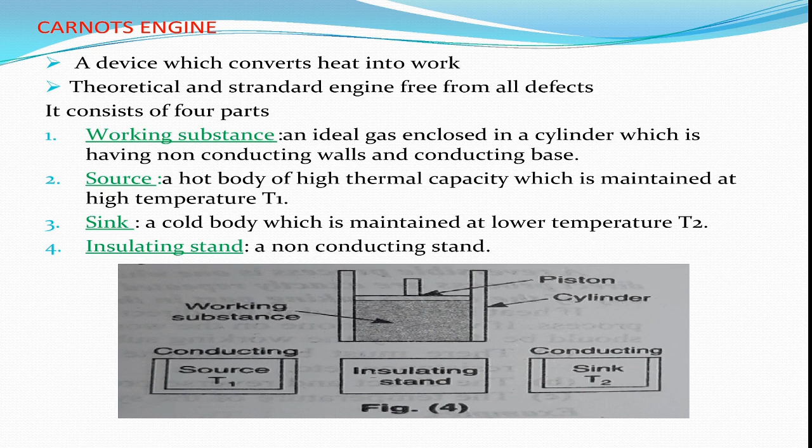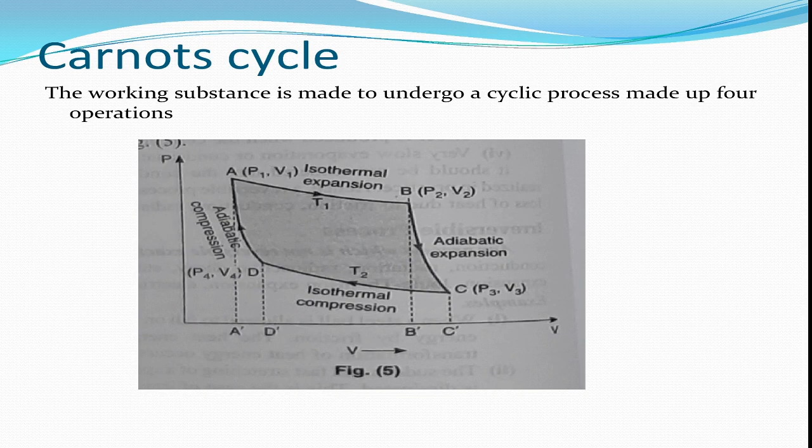Let us see the working of Carnot's engine. During the working of Carnot's engine, the working substance undergoes a cyclic process which is made up of four parts. The first one, isothermal expansion. Here, the AB curve represents the isothermal expansion. BC curve represents adiabatic expansion. CD curve represents isothermal compression. DA curve represents adiabatic compression. Let me explain one by one.

The first one, isothermal expansion. Initially, consider 1 gram mole of a gas contained in the cylinder. Here, A is the initial state of the gas where it has pressure P1, volume V1 and temperature T1. Now, the cylinder is placed on the source and the piston is moved slowly upwards. Here, the base is conducting, so there is a heat flow from source to the gas so that the gas expands isothermally.

Here the pressure will decrease and volume will increase. During this expansion, fall of temperature is compensated by supply of heat from the source. Finally, the gas is at the final state B with pressure P2, volume V2 and temperature T1. Here, the quantity of heat absorbed from the source Q1 is equal to the amount of work done W1 by the gas through this expansion from A to B.

That is, Q1 equals W1 equals integral V1 to V2 PdV. This is the total work done. We can replace P with RT1 by V by using Boyle's law. After integration of this equation, we get the final equation RT1 log base e V1 by V2. This work done is equal to the area under ABB'A'A.

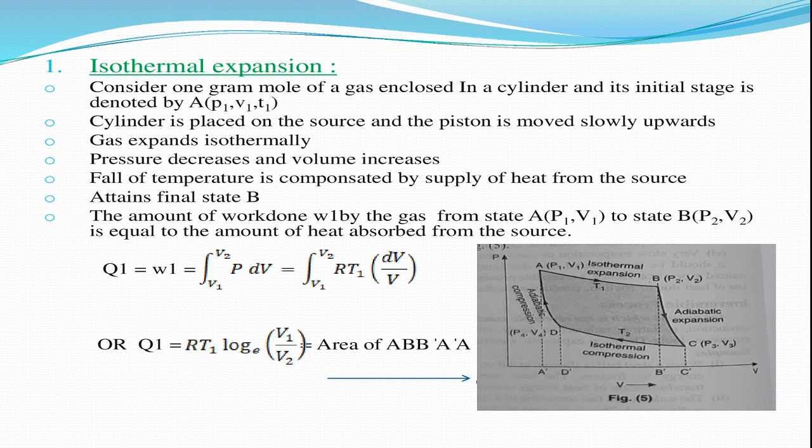The second one, adiabatic expansion. It is represented by the curve BC. In this, the cylinder is detached from the source and is placed on the insulating stand. Now the piston is allowed to move further adiabatically so that there is no heat flow between the insulating stand and the working substance, that is gas. This expansion continues till the temperature of the gas is the same as that of the sink, which is maintained at T2 Kelvin. Here, the gas does external work on the piston by utilizing its internal energy.

Finally, the gas comes to a state C, with pressure P3, volume V3 and temperature T2. In this expansion, the work done by the gas W3 is equal to integral from V2 to V3 PdV. This is an adiabatic process, that's why we can take the adiabatic relation. Then we can replace P with K by V power gamma. After integration, we get this equation. This work done is equal to the area under BCC'B'B.

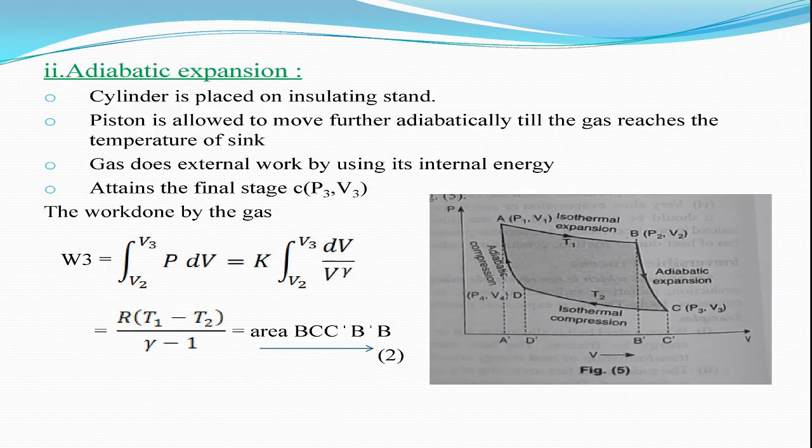Now, third part, that is isothermal compression. It can be represented by the curve CD in the figure. In this, the cylinder is separated from the insulating stand and placed on the sink, which is at a temperature T2 Kelvin. Here, the gas is compressed isothermally because the heat developed in compression passes to the sink. The gas finally gets the state D, where the pressure is P4, volume V4 and temperature T2.

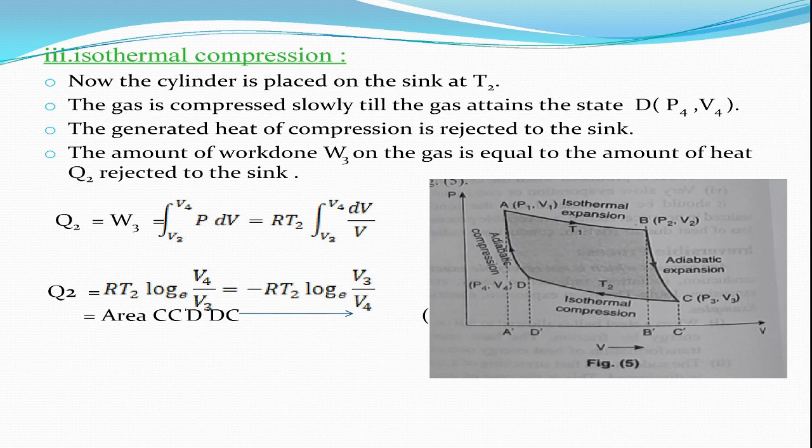Now the quantity of heat rejected to the sink be Q2, that is equal to the work done on the gas. That can be represented by W3 is equals to integral V3 to V4 PdV. We again take Boyle's law and we can replace P with capital R T2 by V. After integration, we will get this equation, and we can modify this equation into this one. So this work done in this isothermal compression is equal to the area under CC dash D dash DC curve.

And last part is adiabatic compression. In this process, the cylinder is detached from the sink and placed on the insulating stand. The gas is compressed such that it undergoes slow adiabatic compression till the temperature of gas rises to the initial temperature T1 and pressure P1.

In this process, the work done on the gas can be represented by W4, which is equal to the integral V4 to V1 PdV. We again take the adiabatic relation in this. We can get the final equation like this. This work done is equal to the area under D dash A dash AD. So these are the four operations.

Now the net work done by the gas, that is W is equals to W1 plus W2 plus W3 plus W4, and we can substitute all the values from the above four processes. We can get the simplified equation RT1 log base e V2 by V1 minus RT2 log base e V3 by V4.

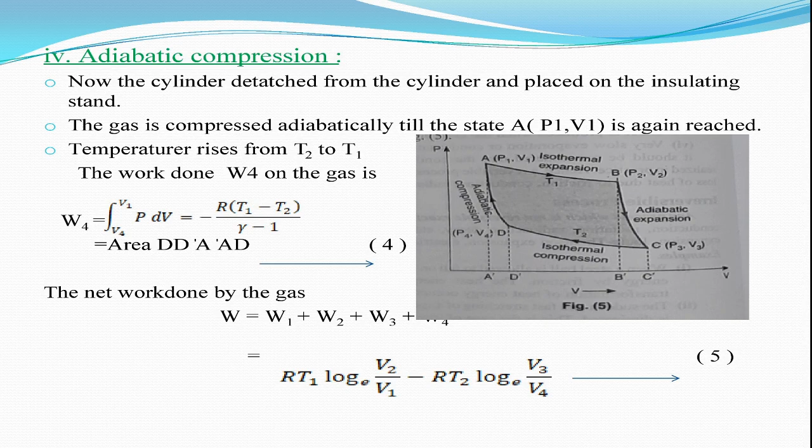Now, the efficiency of the engine. It is the ratio between work done by the engine and the heat taken from the source. That is, it tells about how much of heat is converted into work. That is equal to W by Q1. We can simplify the net work done by taking these two steps. That is, points B and C lie on the same adiabatic.

So we can take this relation T1 V2 power gamma minus 1 is equals to T2 V3 power gamma minus 1. And from this equation we can get T1 by T2 is equals to V3 by V2 whole to the power of gamma minus 1. And again, points A and D also lie on the same adiabatic. So we can take this adiabatic relation. From this, we can get T1 by T2 is equals to V4 by V1 whole to the power of gamma minus 1.

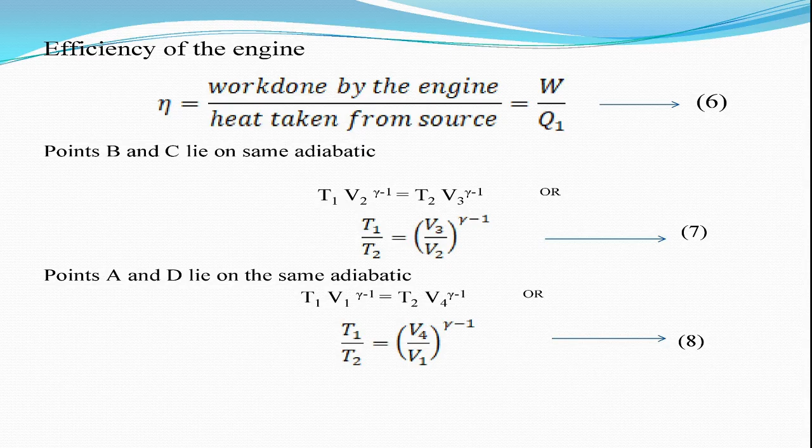From these equations 7 and 8, we can get V3 by V4 is equals to V2 by V1. Now, we can place this equation in the fifth equation, so that we can get W is equals to capital R T1 minus T2 log base e V2 by V1.

So we can substitute this net work done in the efficiency equation, so that eta is equals to W by Q1, and we can place this in place of W. So R T1 minus T2 into log base e V2 by V1 divided by RT1 log base e V2 by V1. We can cancel the similar terms, then we can finally get the equation eta is equals to T1 minus T2 by T1. I hope you are understanding about the Carnot engine and its efficiency equation.